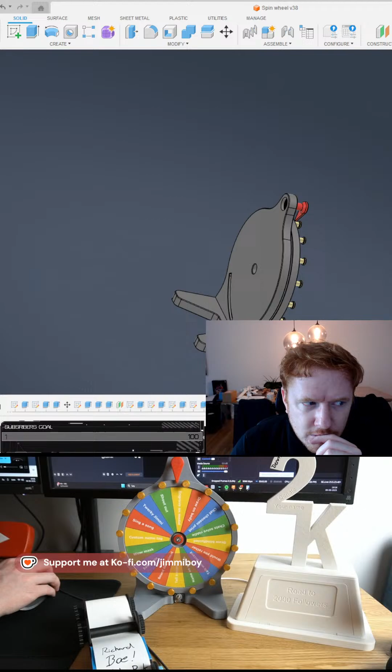Wait, maybe I should do it in English. I built this bearing ball down here to support the weight when I move it around. I mean, it does it, but it's kind of stopping the movement. So I'm gonna try something else.

Shit. Stay there. There. Wait.

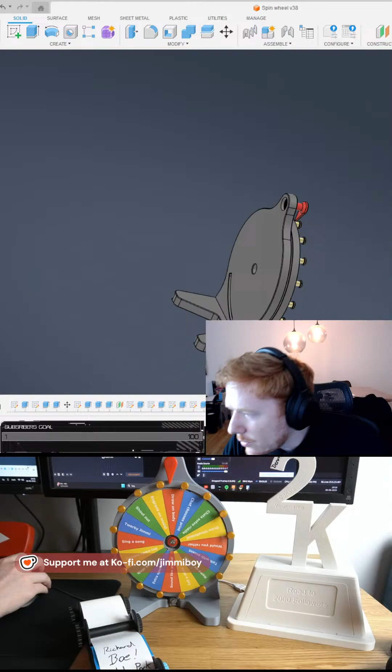Wow. Oh, another thing I have to look at. I think I saw my last video and I realized I sound like a robot. I think it's because... actually I have no idea why.

How do I hear myself? Filter. Do I have a filter on? No. No.

Yeah, maybe I should have figured that out before I started. Wait. Okay, here it is, the microphone. Okay.

Oh my god, fucking commercial.

How do I temporarily hear myself?

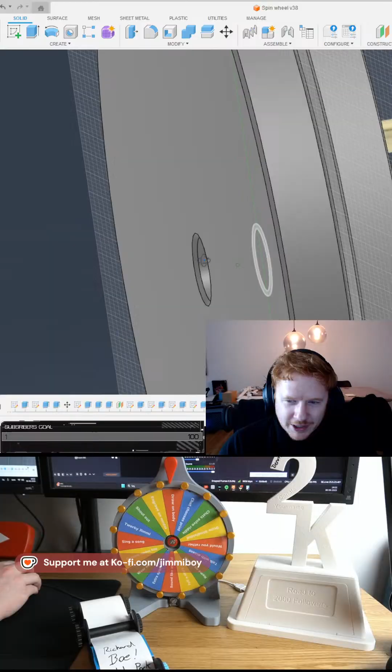So, Dennis, the problem is this bearing down here. It's too wobbly. So when the heavy front here connects to this bearing ball, the whole thing just tilts forward, right?

So what I'm gonna try to do is something a little bit crazy. So I went to Tay Hansen and I buy one more of these. So I'm gonna build something sticking out from behind, and then I'm gonna add a second bearing ball, and then I'm gonna... how do you say it? Extend the axle over to the next one, and then it should stabilize my axle.

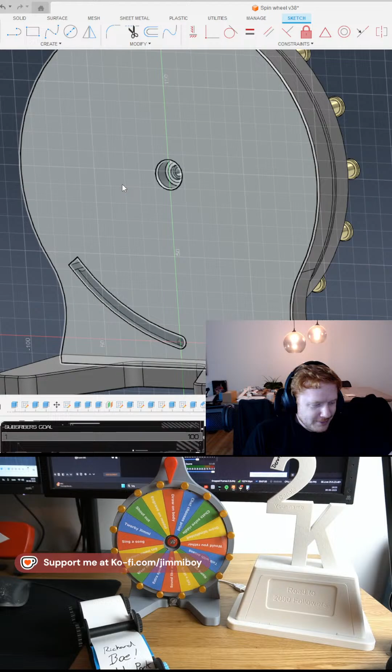Because imagine this, you have my finger. Oh, that's... I was about to do something that looked a little bit weird. Don't I have something that's round? No, I don't. Hey, wait. I can't even show this. It's too greasy. I don't wanna take my finger off and do this and then stick my finger in it.

It looks too weird. But imagine you have a stick in a hole, like this one, right? And if it's just a tiny little wobble here, then in the other end it will do this, right? Tiny little bit here, but here it's sticking out a lot. But if I then have another one here, then it can only do so much. Does it make sense? So by having another one far away from the other one, also in center, should stabilize it.

So that's what I'm gonna try to build. A stabilizing bearing ball. Wow. Let's try that.

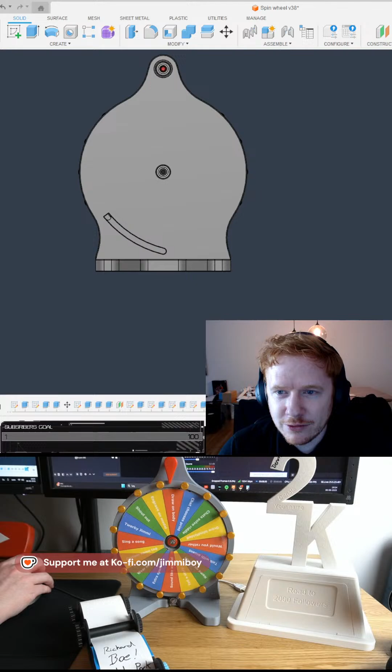I'm not sure how far away it needs to be. Let's go safely and then say 50. I think that should be more than enough.

The only big question is, can my 3D printer... Oh, another thing, Dennis. I did not order my new 3D printer today because I'm waiting for a discount. They say that it's gonna have maybe like a June discount. So why not take that? Gonna save some money. Well, I'm gonna save some free money. I don't know how you say it.

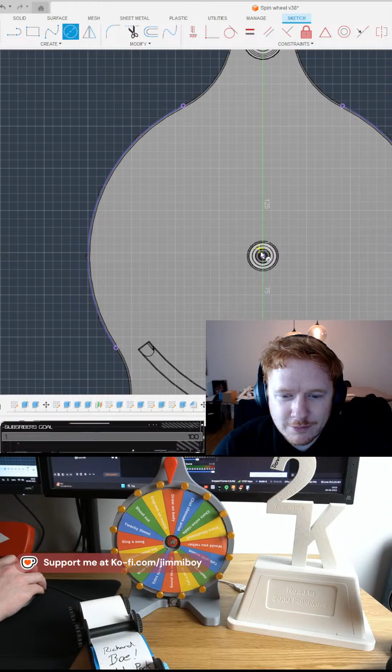Okay, so we have that thing. How do I do this? Actually...

Okay. We're gonna start over here. Delete this, delete that, that. We only need this.

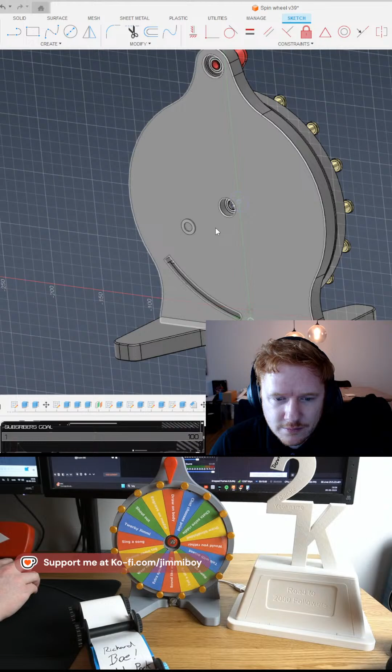I'm not in the sketch. My computer's acting weird. Huh? I cannot right click on my sketch now for some strange reason. But I'm not in the sketch. What the heck? Now I can. Weird. What is going on?

Okay, now it works. Weird.

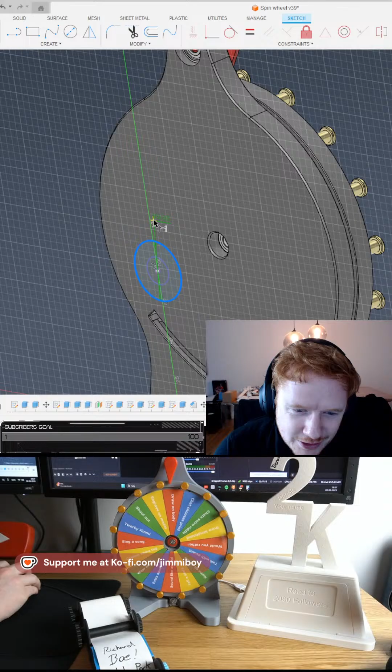Then we have Spotify getting free commercial again. Ooh, how dare they. Okay, we're gonna try 10.

Yeah, I mean, we already tried to fix it one time. The problem with my current design is this little bearing ball here cannot stabilize the whole weight of the wheel.

Why don't I have it hanging equally far out on both sides?

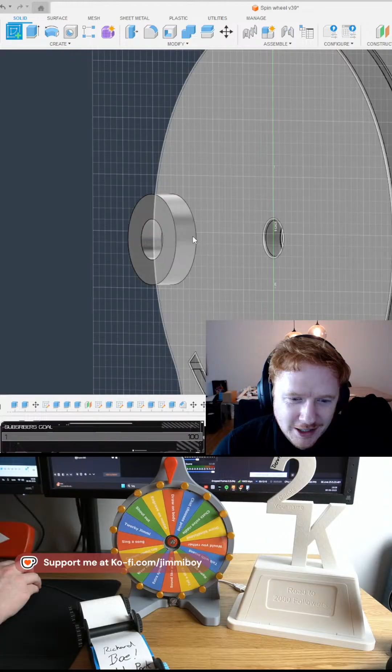I'm from Denmark. I don't know why, but all other people that come to my stream are from India. I have no idea why. Maybe only Indian people find engineering things interesting. I don't know.

Well, Danny, are you proposing something? Because I don't understand what you just said. Sorry.

So now we have this thing, and now I have to hook it.

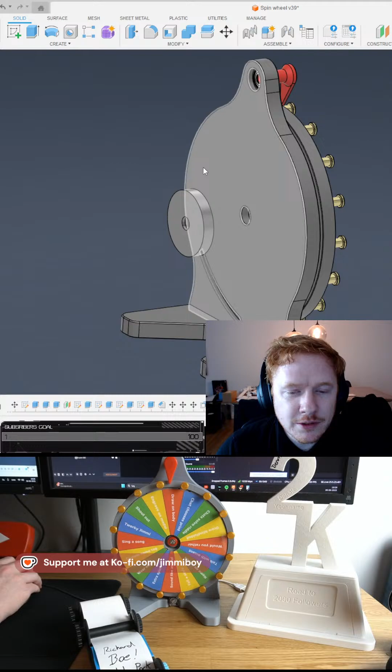We have to create 3 arms that's grabbing. Can we do 45 degree?

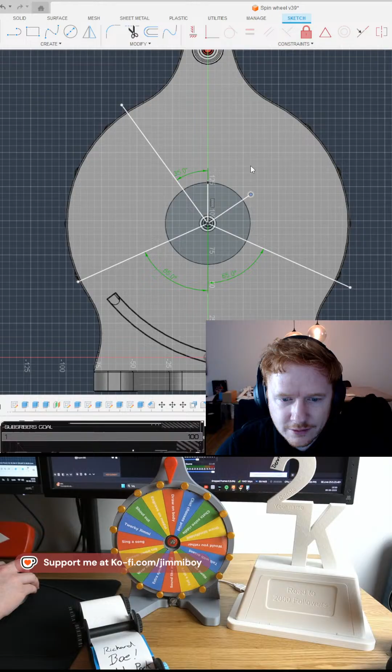Oh, thank you, thank you. Oh, you see, Dennis, other people from other countries think I'm very handsome, huh?

Well, I'm not really an engineer, but I do engineering work, I guess. I build machines for a company here in Denmark. I still wonder why they have me there, but I'm there. I make a lot of mistakes sometimes. Just ask Dennis.

We don't want to do that feature. We're going to offset it. I think 10 should be enough. Maybe 6.

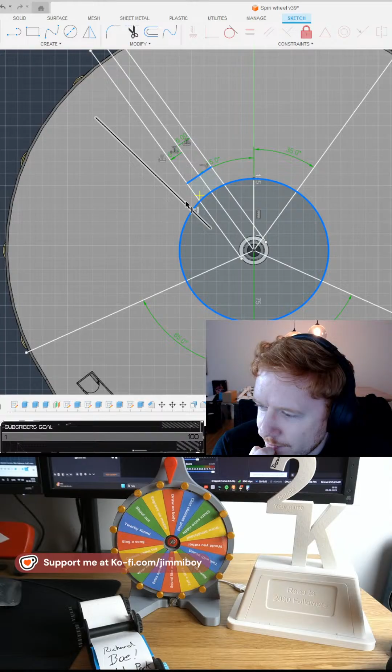Okay, we're gonna do this there, and then we're gonna mirror this feature. Boom. Oh, actually we should have done the other one also.

Yeah. You're more than welcome to.

Let's hope we can fix this thing.

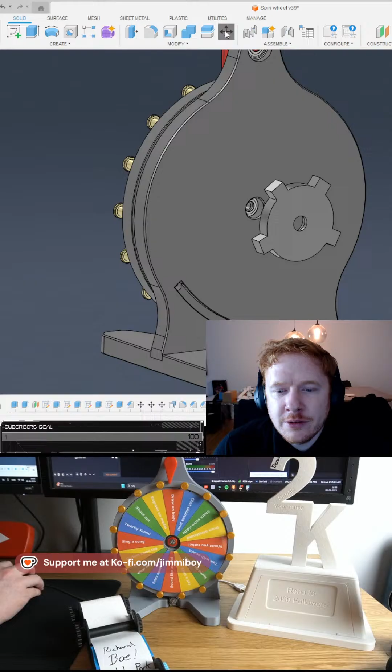So what I guess we should try is to offset. Let's push this one back 10 millimeter. We're gonna offset this thing 10 millimeter.

We're gonna draw. We're gonna take this line and this line. Wait, wrong line. This line. Project.

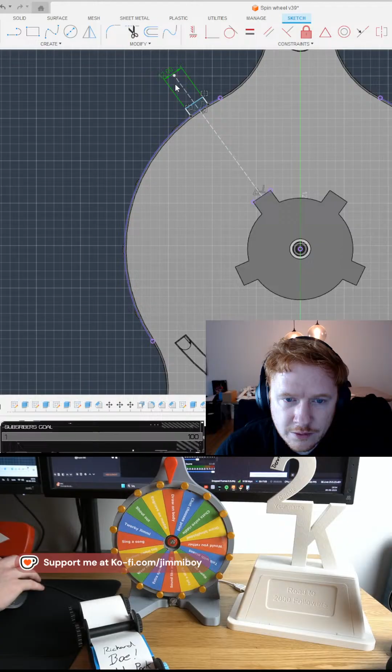So now we have this thing that's hooking onto... yeah. Or should I do 15 and then start?

Now I have to connect these two.

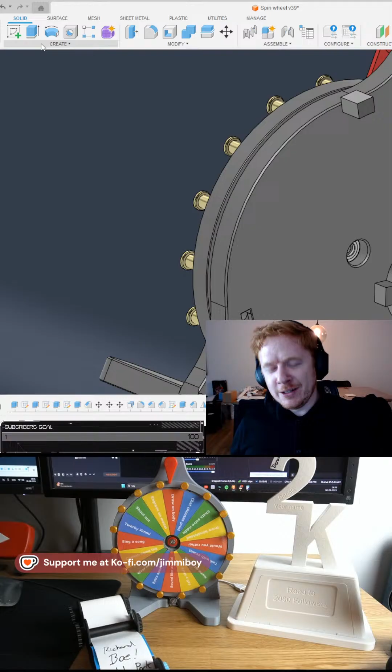Dennis, do you know how terrible I am at understanding when people try to do something via text? I need to visualize it. If I don't see it in my head, I don't understand it.

You're going to make it land at the same point with that setup because there's no equilibrium.

Well, I just want the axle to go through this one and also this one to stabilize it more, because then this one should not be able to wiggle as much as this one. I mean, when it's... yeah, I hope you understand what I mean.

Just wait and see, then it's gonna be fucking awesome, okay? It's gonna be so great. Hopefully.

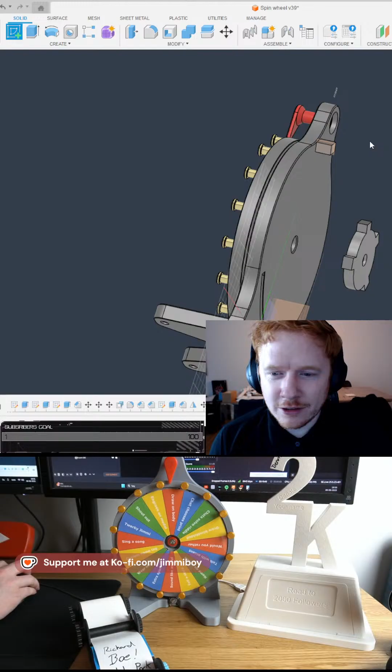Let's do a mid plane on this thing. Then we're gonna draw the guideline. Boom, boom, boom. It's gonna project this one and project this one.

The only issue, should I do this and this? Or should I go straight?

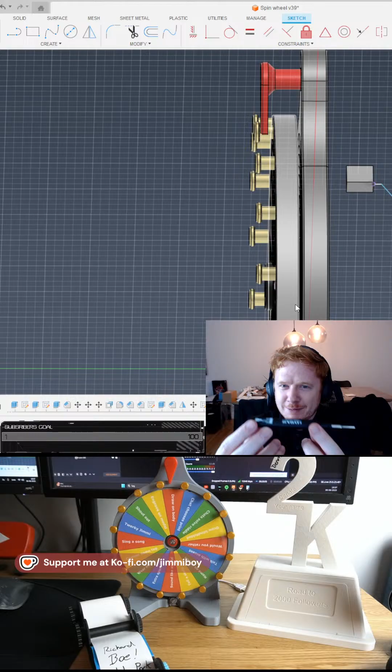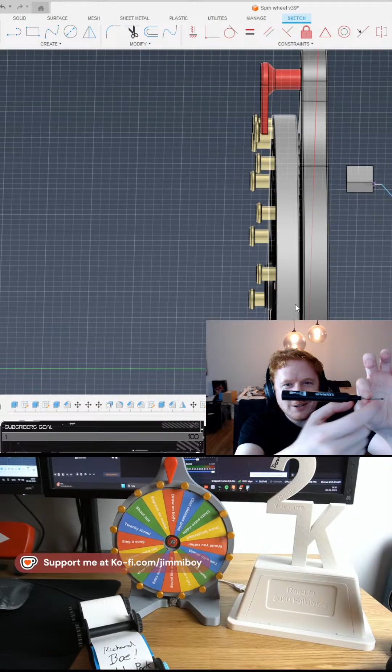This is my axle, okay? Right now I'm having it here, right? Imagine that, actually here. This is the wheel in front. Oh, I just touched the... whoops. And now the load is doing this, right? It's slightly bending it, but because slightly is a lot in the other end, right? Imagine it. Then if I have a bearing ball here, it can only tilt so much because I have two now. The longer I engage this and the longer I have my other bearing ball, the more stable this thing will be, because a tiny little bit here is a lot here. Do you understand? So this thing down here, if I stabilize this end, then this thing will be completely straight. You see? That's the point. That's the thing we're trying to do. Even ChatGPT told me to do this. I trust ChatGPT sometimes, not always, but sometimes. Yeah.

And this is the easiest thing that I could test, so I'm gonna try it. So actually, imagine we have this laying down. This is gonna be an issue.

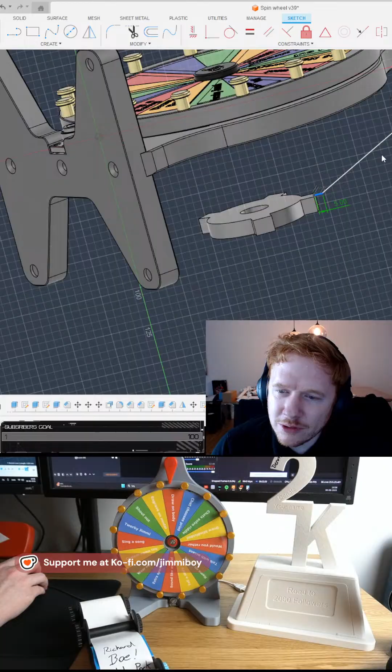The perfect setup would be if we can get this thing in 45 degrees, because then we don't need support. Right now we only have 27, which is a big problem. The only way we could fix that is to increase the length of this thing.

Right now we have it here, so let's try. Yes, Dennis, exactly. That's what I'm gonna try to do. Now you get it.

I'm gonna make something that's gonna fit exactly around the rounded part here, so that I can just hook it on the back, put my axle, make a longer axle, and then it should technically get straight. Let's see how much we have now.

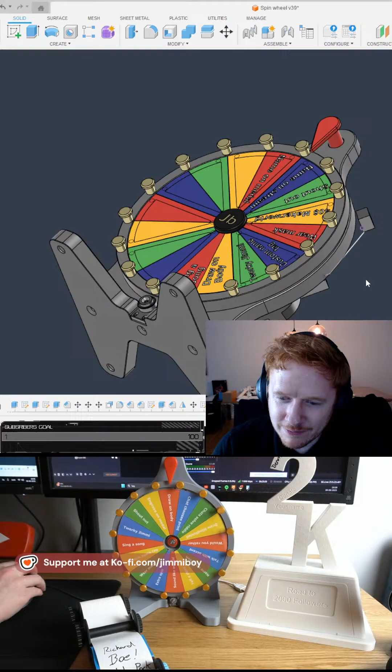Now we have 30. Oh my god, it has to be much longer. How much then? 70?

Okay, let's see now. What do we have? Oh, now we have 50. That's good, but it's kind of too much. We kind of want to hit 45 because it looks kind of stupid with this thing sticking out so much. Let's try this one.

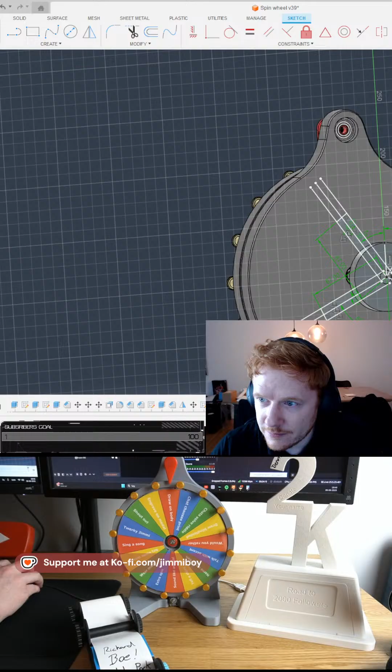Oh, no. I'm not making a weight, I'm making an extra bearing ball connection or whatever you call it. Okay, let's go with this.

We're gonna make a hook. I kind of need to round it though. Fillet.

5. And here, 5. Actually, that might be an issue. Yeah, I think that's a bad idea because then it's gonna need support. Let's try keep it straight if it can. I don't know if it can do that.

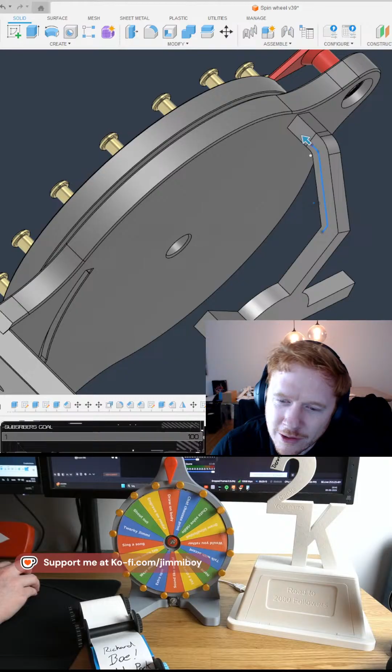Let's see. Sweep this one, path this thing. Oi, look at that. Oh, wow. Oh, I forgot to remove the rounded part there. Damn it.

Okay, there. Sweep this thing, path this thing, boom, join, bang. And then we mirror that feature. Boom, boom, boom, boom.

So there's one hook. Wait, why is this one longer? Huh? What happened? Ah, that's because we don't have that part yet.

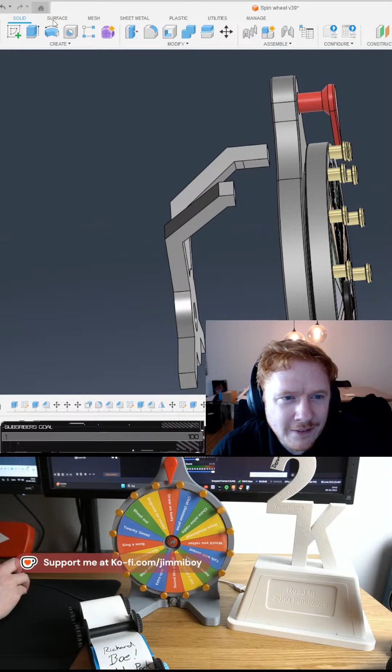We kind of want to have like a guide. Let's do that after. Right now we just have to create the hook.

Now we have to do the same again. Now we don't have the plane. Where is that? There.

So we're gonna make another, gonna project this thing straight out. Draw this thing. Boom. Boom, boom, boom, boom.

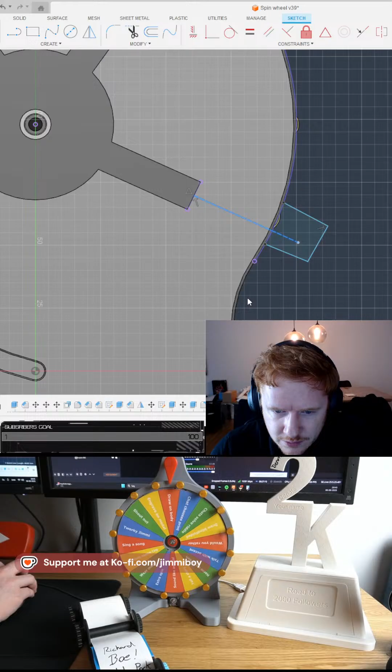Make it symmetrical. Make it parallel. 10. Straighten it out. 10.

I don't even remember the measurement before now. I think it was 10. Then we're gonna make a mid-plane between these two.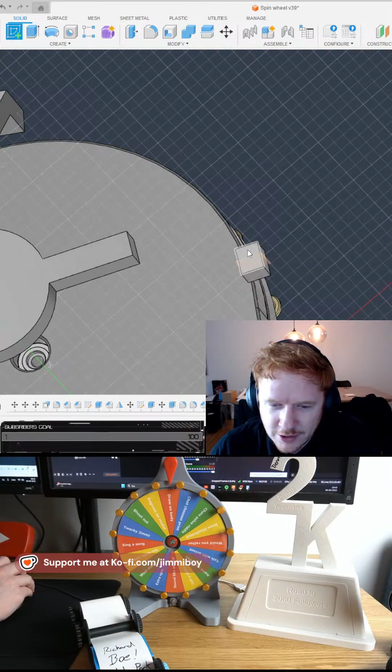Oh yeah, I've been doing this for many years. That's probably why it looks a little bit easy. I mean, it just needs practice, and then yeah, eventually you will get there.

See, I don't remember what I did before now. Did I do 5? Definitely didn't.

I have to check what I did on the other arms. I did do 5, but this one is longer. How much is this one? 15, okay. That's why.

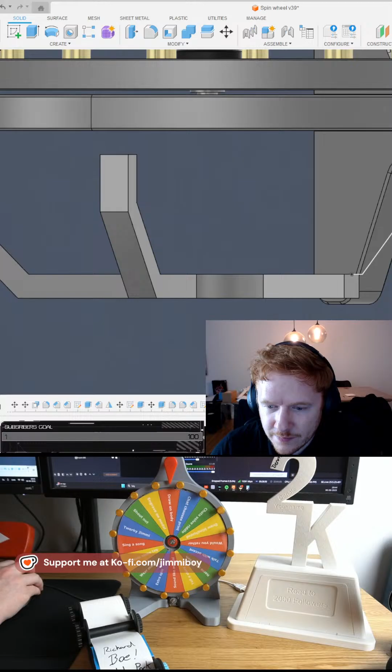Now it should be the same. Let's check. Oh wait, what happened there now? What is this?

Five, but why is this one not locked? Okay. There. 47. Yes, great. Then we're gonna sweep it.

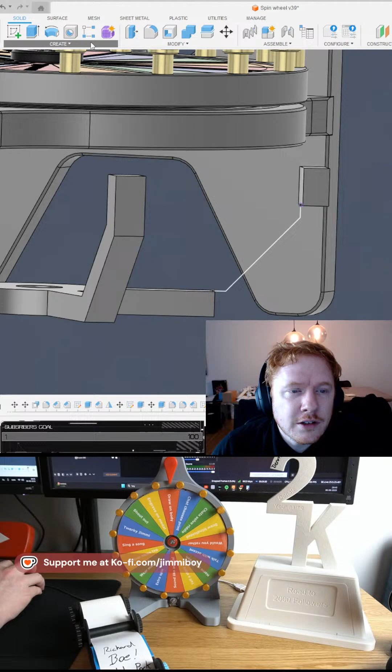Path. Join. Mirror. Why is this one not connected? Huh?

Wait, I don't have the right size here for some weird reason. Why? Oh, I forgot to put this measurement here. 12. There we go.

So now we have a hook feature. This one. Boom. Boom.

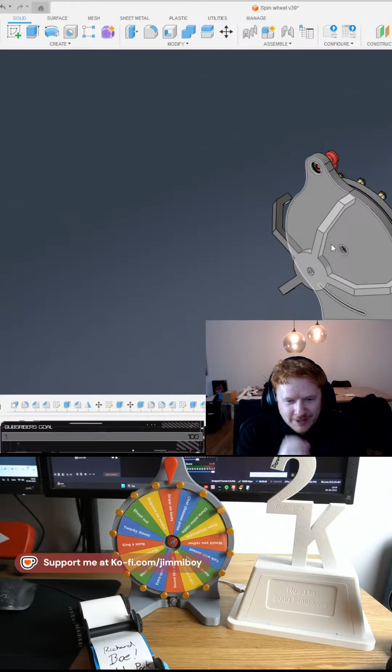My day, Dennis, I stayed long at the company today because I was far behind. I was there until 5. So yeah, actually, it feels like I almost got home, but I don't know. I don't know what I've been doing for the last 3 hours or whatever.

Okay, now we have this thing. Now we want to create kind of like a wall to make sure that we only reach 14.

Let's do this. We just need a little wall in 45-degree angle. And why we do 45? Because we don't want support. Actually, it's better to do less. Boom.

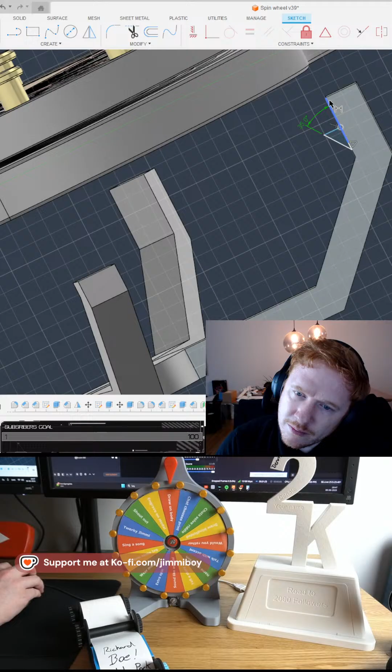Then we want only 14 here. Oi. That's a tiny wall. Wait, why do I still have an edge there? Ah, I know now.

It's because this part is rounded with the... yeah, it's fine, it's fine. Join. So by... oh, okay, we need to stick it in a little bit. That sounded weird. That sounded really weird.

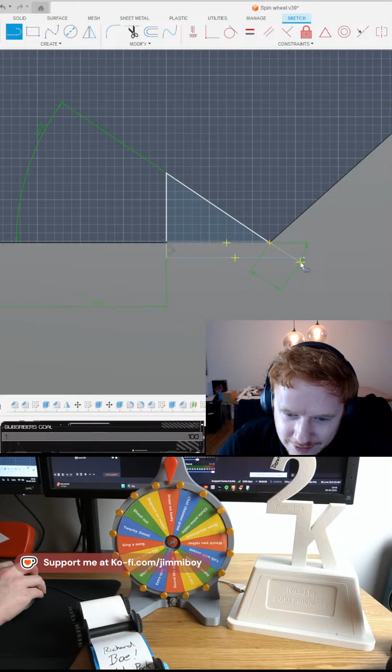So now when I push it up against here, I have a guide to tell me that it's gonna be exactly the same on all of them. This one needs to be extended 15. So now I have to mirror this feature according to the mid, and then I have to do the same here.

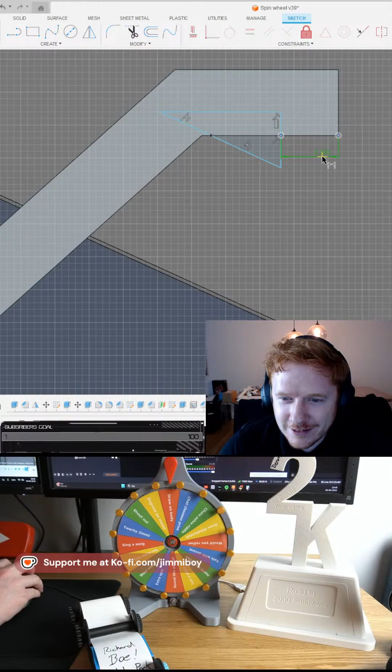Boom, boom, boom. Wow, this music is so de-stressing, whatever you call it. You're welcome, guys, I made sure you don't get stressed today.

Wait, this seems weird now. Doesn't look like the other one. 14, 2. Okay, I guess, I don't know. Let's do this, it's not so important.

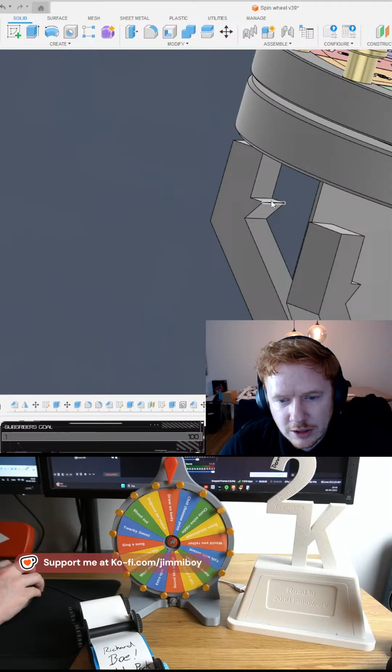Mirror feature. Boom. So now we have the basic of our hook. We just have to move it back in place. That was too much, I think there. Boom, look at that, wow.

Not sure how we should fasten it though. Probably we'll just glue it. Nah, that's not gonna work. I know, there's only one of me. We could try and make it beautiful. I'm just a little bit afraid it's gonna fuck up. Yeah, I don't think that's gonna work.

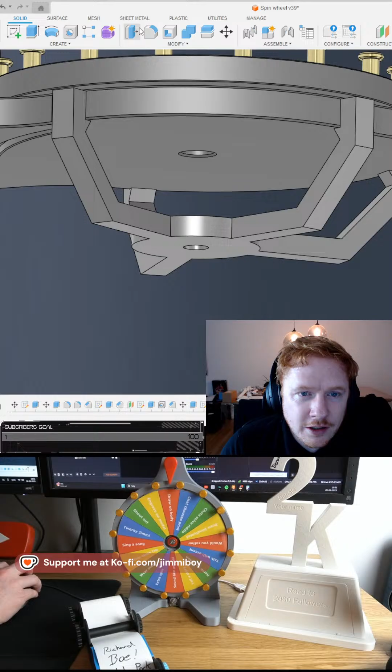What we could do, we could make it stronger here. It's always good to add some roundings, it's gonna make your print stronger. Boom, boom, boom. This almost looks like some alien piece of thing. I can also do it on the inside here. It's gonna make it stronger there, and there, and there.

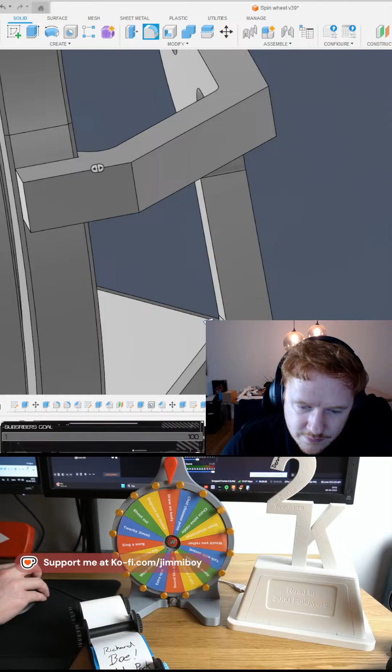Yep, I guess we can try add a little rounding there.

Oh, it's not a lot, one spool of filament, the gray that you see here. How much is that? It's like 20 euro. And how much did I use? I'm pretty sure you could print this setup, give or take, maybe 2 times with one roll, just the gray part. And the other ones, what costs money is if you want many colors, then you need many spools, many colors, you need many spools, one for each color. So if you don't have the colors, then it's gonna be costly.

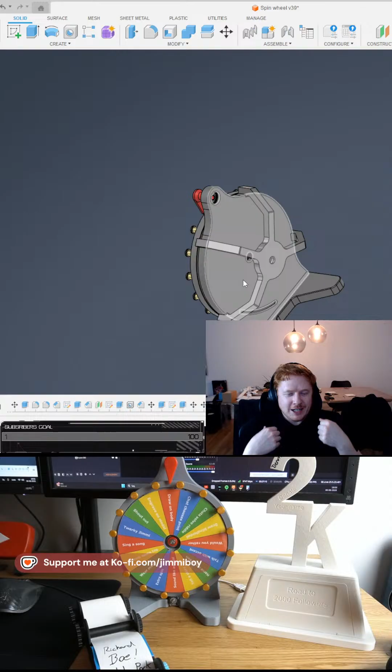Yeah. But for me, I don't really pay anything for my materials because I make a lot of designs, and when I'm done with them, I upload them to a website called MakerWorld, and when people download my design, I get points, and for the points I can buy a gift card, and for the gift card I can buy material. So I don't really have any cost on my filament. That's one way to save money.

I guess we can actually make a rounded part up here. That would not be a problem. There.

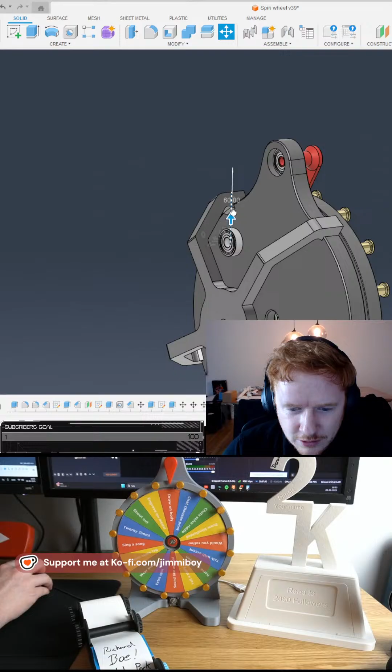Man, I really hope this is gonna work, but let's see. We need one more of these. I don't know if I can copy them. Oh yeah, I can, cool. Now we just have to center it.

Oh yeah, that's harder than I imagined. Is it there? I think so. So what I usually do is I put it near, and then I go here, and then I do edit. Of course I cannot do that then. Can I choose what area I want to move it with? No, I cannot, never mind.

So first of all, it's too small, we need 22 in diameter. Right now we have 16, I think. Huh? Oh actually, we don't even have. Whatever, I'm gonna make a new hole, and we're gonna set the height.

That's gonna be a lot of work to hide all that. Never mind, we're not gonna hide anything, we're gonna do it from the side.

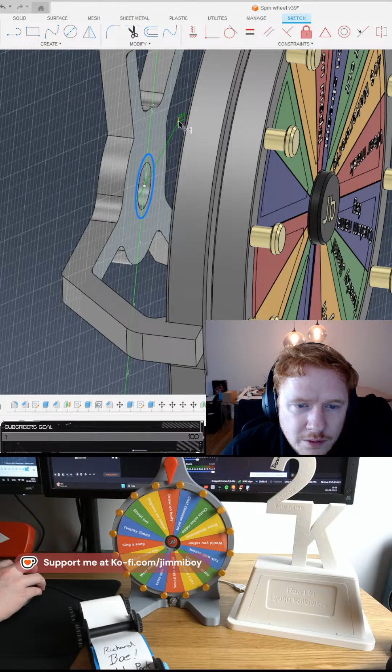Yeah, but the problem is that this big part here, I don't really have any material inside it, so if I drill into it, it's probably gonna be hollow. So I think I will try just to glue it in the first place and see how it goes. But the big challenge here is to see if my 3D printer can actually print this exactly, because I imagine if it's just slightly wrong, then it's not gonna fit in the middle at all. But let's see, let's see.

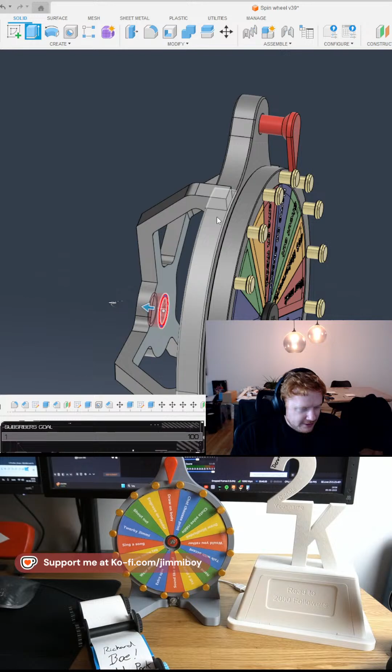22, 7, and I think the inner part is 8. Yes, and now my fingers stink of oil. Okay, we're back. We are gonna move this thing.

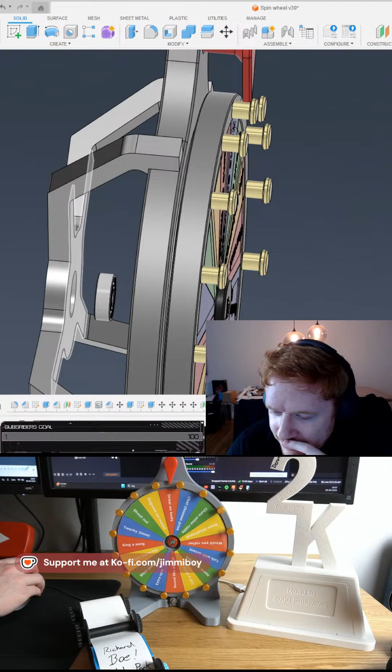Oh yeah, of course I can just order it right from a milling machine, it's very cheap, I'm hoping. Wait, what? Why is it suppressing my feature? This program is so strange sometimes. When I try to move this part, do I have to move it in front or what? What the fuck happened now? Okay, now it just disappeared from my line here. What the heck? Weird.

Huh? Ay, what happened now?

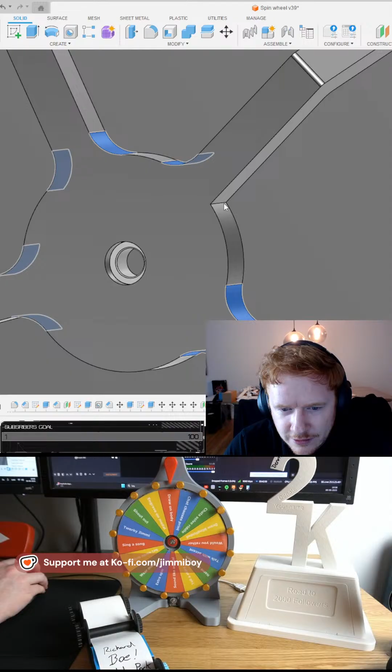Wait, why the hell we don't have a rounded piece there? We forgot one. There we go. Now we have this part.

So basically we want to make it more beautiful. We're gonna add some chamfer. We're also gonna do something here. It looks a little bit weird. Maybe like that. Boom, boom, boom, boom. Yep.

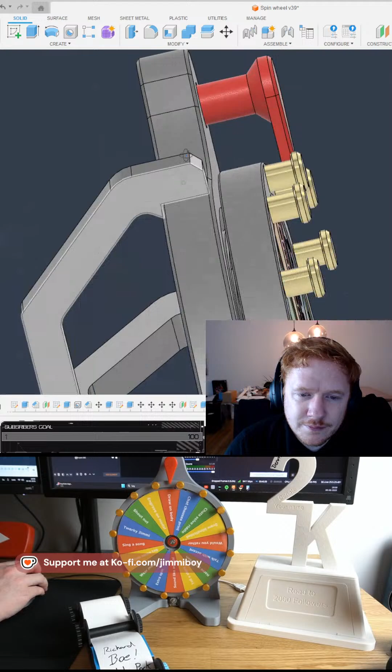And then to make it even more beautiful, well, okay, I don't know if that's beautiful, but we're gonna do that because it's easier when we have to put the chamfers. Then they're gonna automatically come all the way around. Boom, boom, boom. Chamfer time.

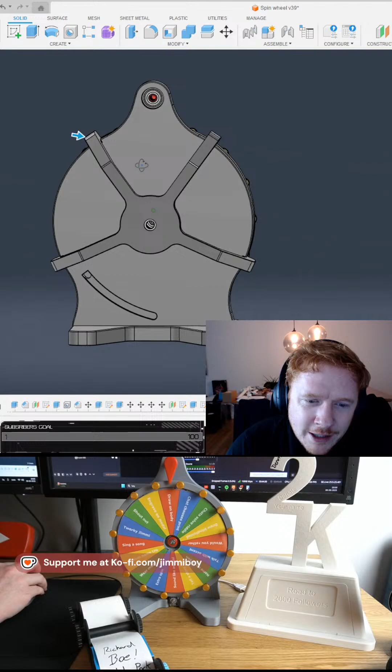0.5. Oi, look at that. We're breaking the sharp edge. So now we don't cut ourselves. The same we're gonna do on the inside. Boop, boop, boop, and boop. There we go. Look at that. Perfect. Kind of look like one of those aliens that just jumps up and sticks to your face.

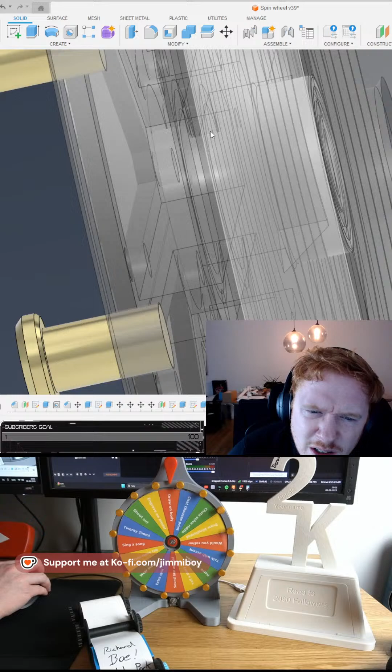Just checking right now if it's where it's supposed to be. It's a little bit hard to see actually. I guess it doesn't really matter too much. Well, one thing I have to correct first is the diameter of the axle because I remember that I changed it.

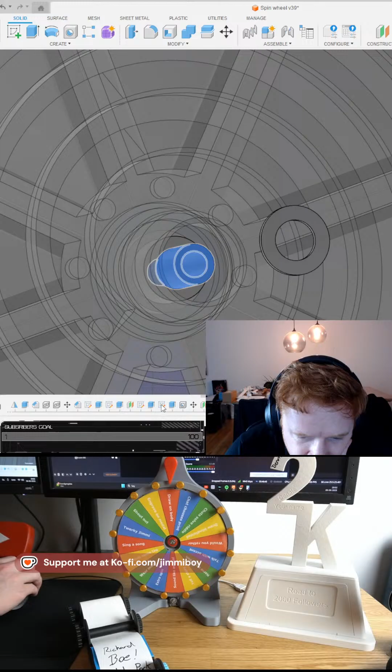Right now I'm looking in the feature tree to find it, but it's a little bit hard to find it actually. Wait, I have to hide this one. Where is that feature? There. No? Even way back. What the heck? Go here. Here it is. I found you.

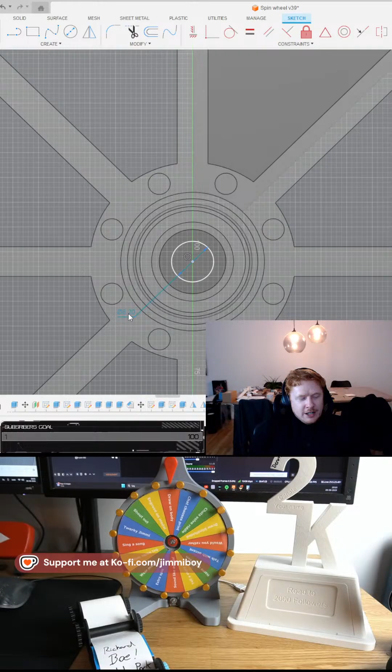So I've been struggling a lot with this one because I thought before that it was the axle that was too loose and that made it wobbly, but it was the ball bearing itself. So I was trying to print many different versions of this axle.

I think we're just gonna try and make it 8.1. Or maybe even just 8. Let's try that.

And then I have to do something here. Seems a little bit strange. Right now it's just loading. There we go. Yep. Okay, now we can extend our axle.

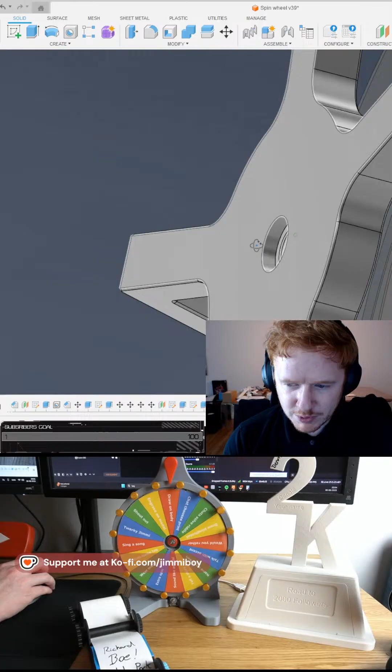I'm a little bit unsure how big the backside hole should be. What is this one? 16, really? Wait, forgot to press OK. I think I will keep it just a little under. Or do I?

Wait, am I having an issue now? I think I am actually. Oh yeah, I am. Well, it depends.

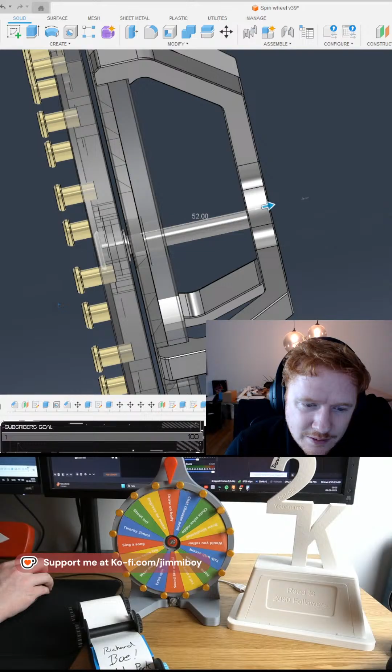This is a 4mm. Can I get a 4? Oh wait, this is not a 4, this is a 5. Oh yeah, I think I can get a 5. That is 55. I guess it doesn't really matter. I guess we just do this. Boom.

For what you mean? It's a 5. It's for a bolt of 5. M5. Yeah, you can get 55. I know, but I don't think I want it to. I want the bolt to stick out because then it will.

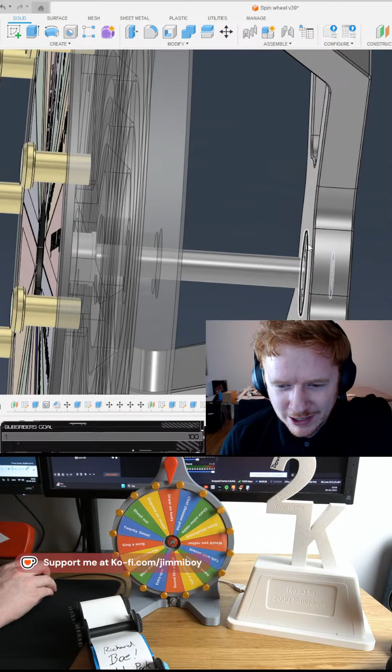Actually, I think it's a bad idea that I put the bearing ball on that side. Yeah, it's a bad idea because if I tighten it around this surface, then it will rip out the bearing ball. Yeah, I have to make it the other way around. I have to take this thing, edit.

Hey. I have to do it oppositely. First we should close this gap, if I can.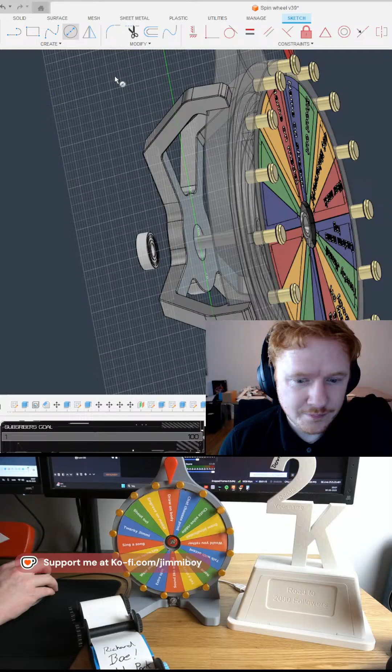And then we're just gonna make a 12. Doesn't really matter. Oh wait. We're gonna say -3. And then here we are gonna add the hole for the bearing ball. 22, -7.

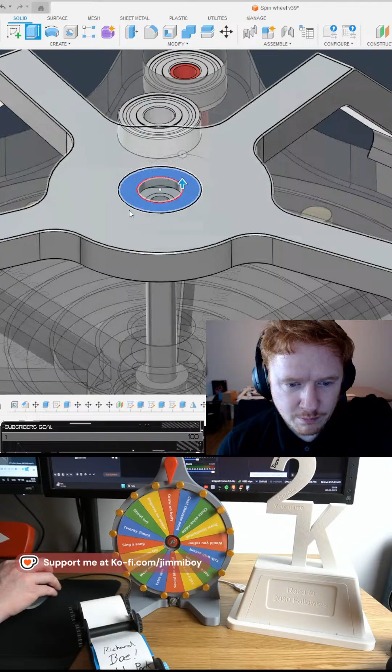There. Then we're gonna move this thing. But I don't know if I can do this now because this thing is stupid. See, we cannot. This thing always goes back in time for where I put it in. So I have to again, holy shit. I have to again copy it. It's probably easier just copying this one and then going backwards.

Yeah. Perfect. Why is this thing not long enough now?

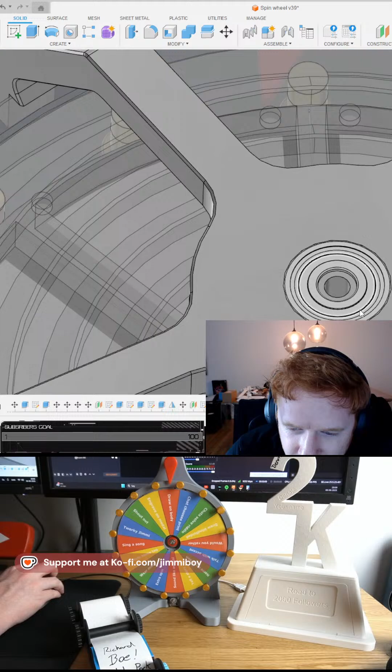So we want to push the axle into that thing. There we go. Yep. That's basically it, I think. I'm not sure, the only problem is I don't have this bolt.

Damn it. Or do I? I don't know, let's see what happens. No, I don't think so. I guess I have to buy it. Oh well.

So this alien piece is gonna hopefully save my design. And then I'm just gonna put the old foot on because I don't need this little bearing ball down here. That didn't really do anything good. Oh yeah.

The only thing I have to worry about now is what color should I make this alien thing at the back? Should it be the same gray or should it be a different color? What do you say, chat? I think it's only you, Dennis.

What do you say, Dennis? What color should we do it? Green? Really green? Does it fit in? Does it fit in, Dennis? Green? I know you love green. Green?

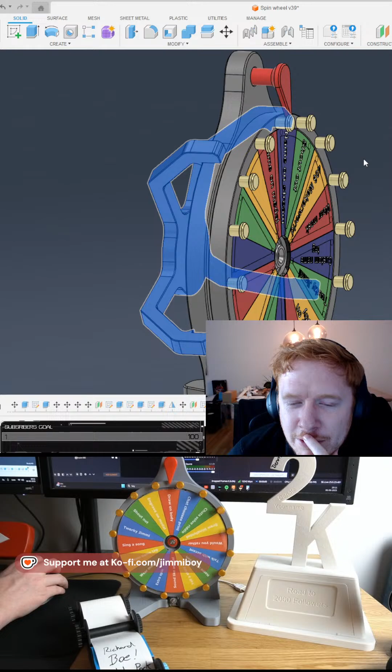Gray. Wait, just wait a second. Look here. Boom, look at that. Ooh, I mean it would look cool if it had this shiny effect, but it's gonna look like those yellow things right there. Yeah, like that.

But I guess it could also look cool. I have gray, black, red, metallic blue, metallic green, neon green. Then I have some weird, it's like a weird girly combined color, I don't know what you call that. I have a blue that lights up in the dark. I have a lot of color, Dennis. I don't even know, a lot.

I think just to make it stand out, I don't know, should we do gray or gold, Dennis? Gray or gold, you decide. I only have green and blue. I don't think that would fit in. Would it?

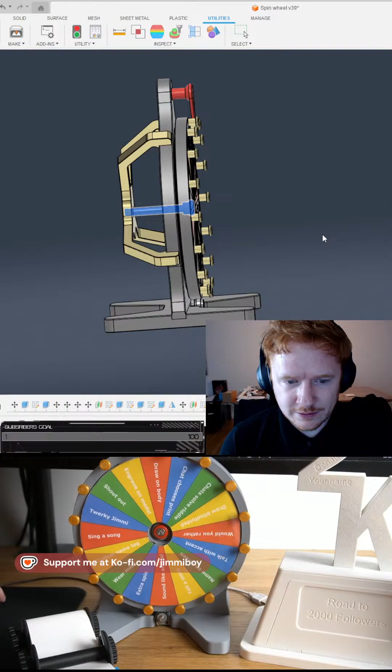Okay, now I just have to start it. We're gonna do axle on one and the other thing. A little bit of shame you guys cannot see my Bambu setup, this thing that I'm using now.

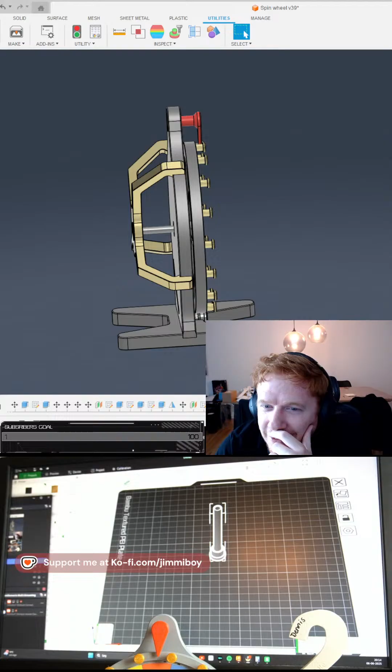Wait, maybe you can if I do this. Look at that. Wait, now I can't see what I'm looking at. 2 seconds. Oh, it's a little bit hard to see, huh? Yeah, that's the stick. And that's so terrible.

So this is the plate, and we want this thing to be absolutely solid. Yes, slice. Okay, it wants to add a brim, that's okay. Print, we're gonna use Gammel.

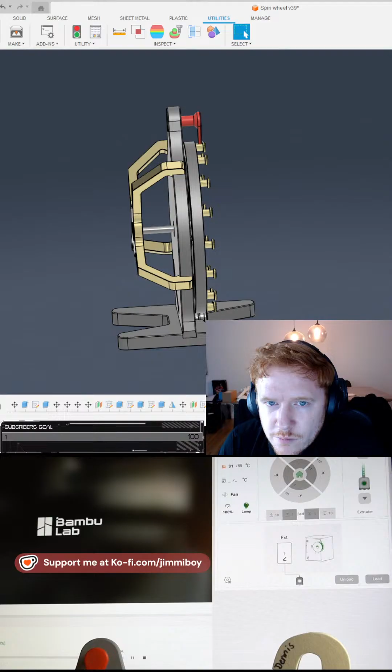And we're gonna send it. We are sending it to the printer. And then we're gonna have the other one. Other one comes here.

The alien tech. This one we want to add support, tree support is what I prefer. And we're gonna make it, I think we have to make it strong, but not necessarily super strong.

What do we? 50 maybe? Let's see.

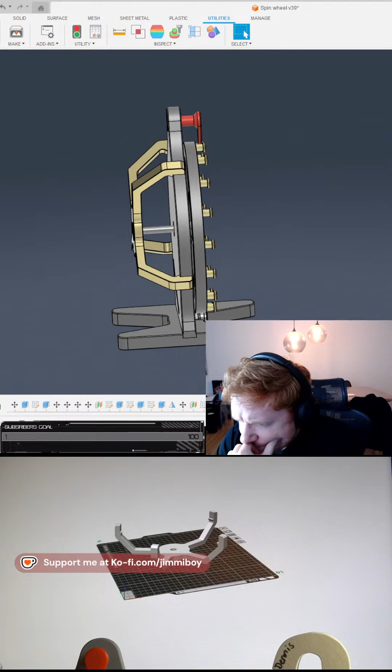Well, let's try this, see how it goes. Actually, in the middle part, this is what's great about this printer stuff, we're gonna make it solid in the middle. Cylinder.

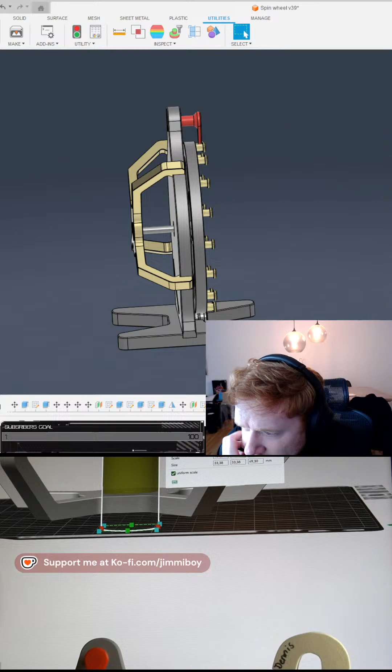Resize. Whoop. Because when we need to put all the pressure on the print, we want it to be strong. So we can tell that everything that's within the yellow line is gonna be solid, and everything else just 55%.

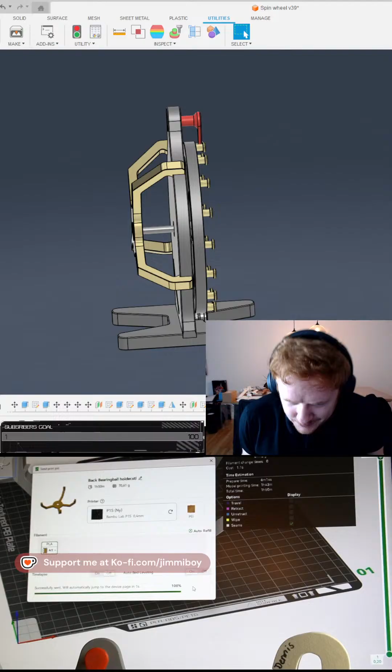Yep, that's it, we did it, and I will come back with an update on how this thing goes. Hopefully it works, so I don't have to do more work on this thing. Spending a lot of time designing this wheel.